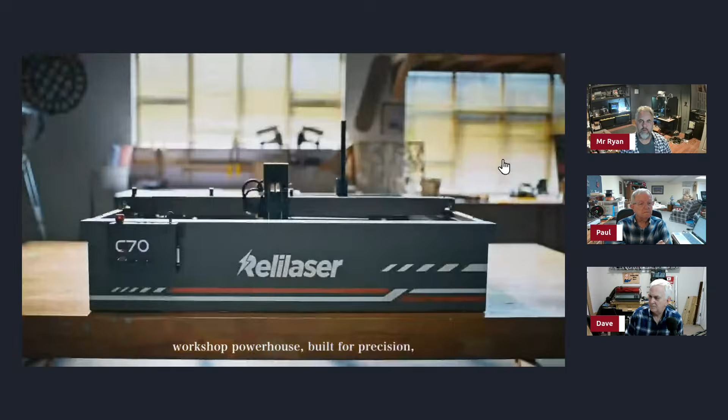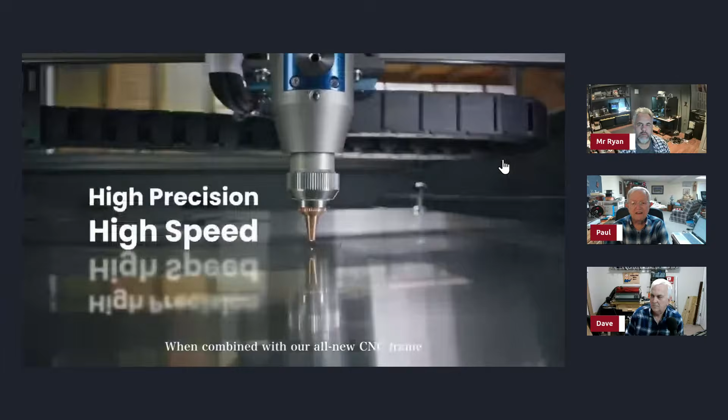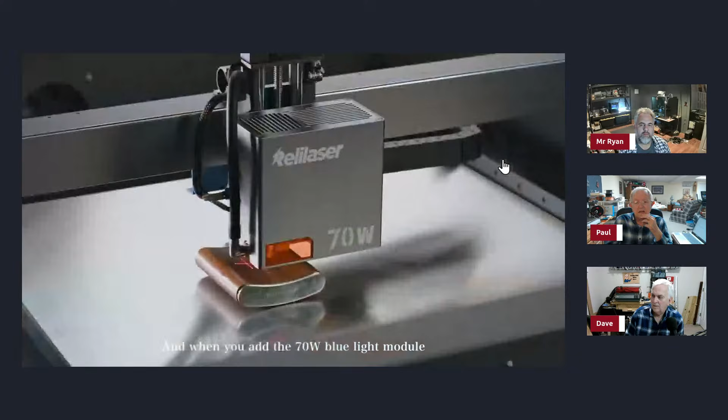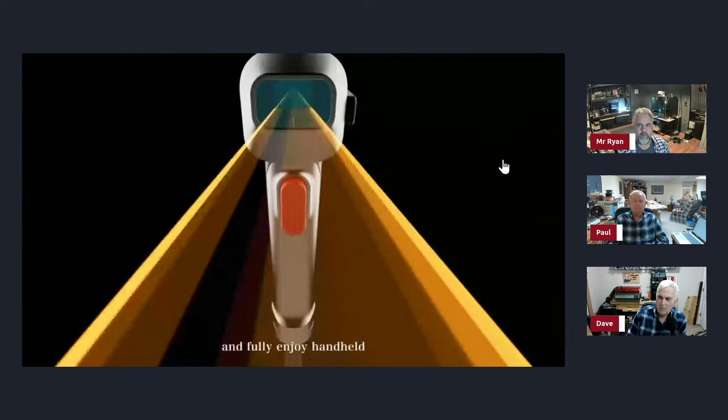I agree. Oh wow, 800 by 800. So I guess it's a dual purpose machine. Oh wow, that's cool - a little corny for me having AI where you talk to it for adjustments and stuff.

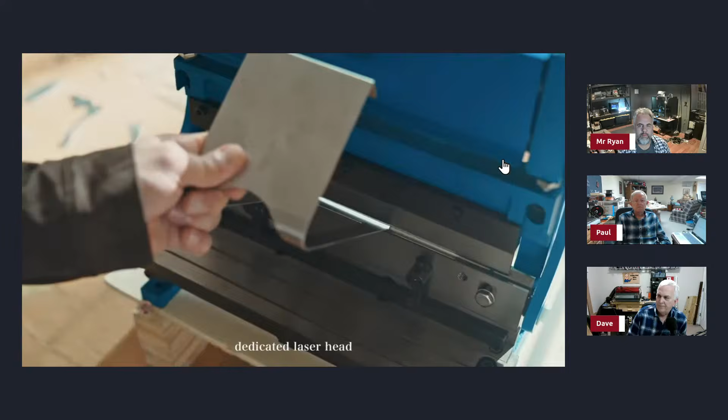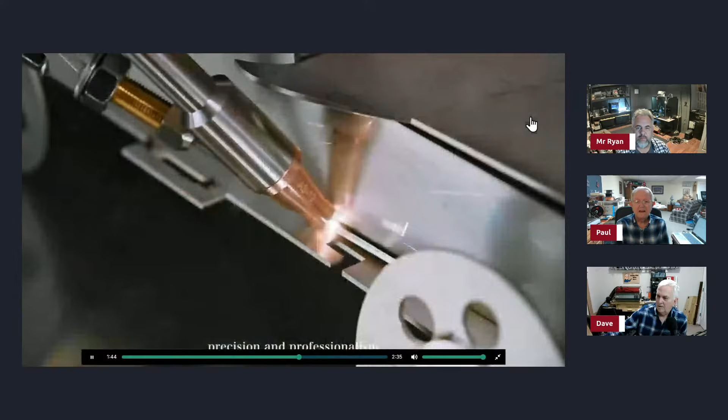You think that guy's ever run any machine before? Looks like it can make some pretty cool stuff. Yeah.

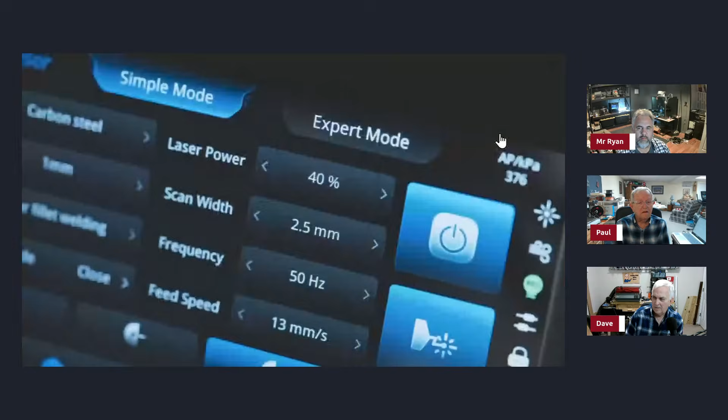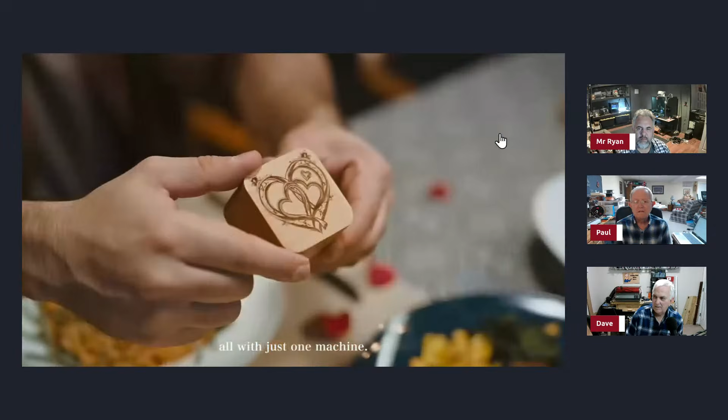But I don't know, what do y'all think about this? That guy makes it look just too easy.

All right, now it's 800 by 800 work area, so that's... I'll be right back. That's a big work area. Well, it's what, about 3 foot by 3 foot, or maybe a little less than that. Let me see if I probably... let me see if I can. I'll do some calculations.

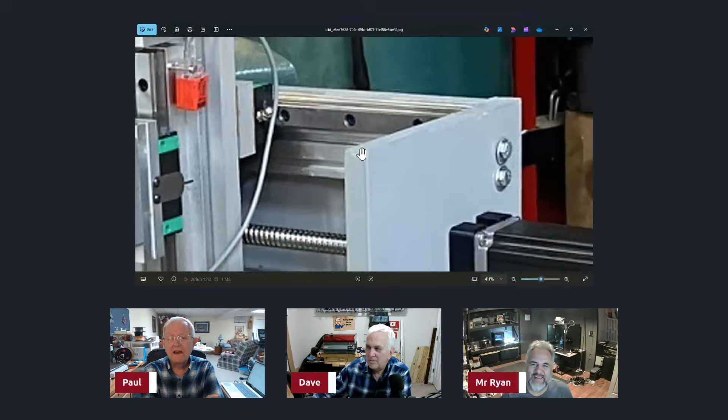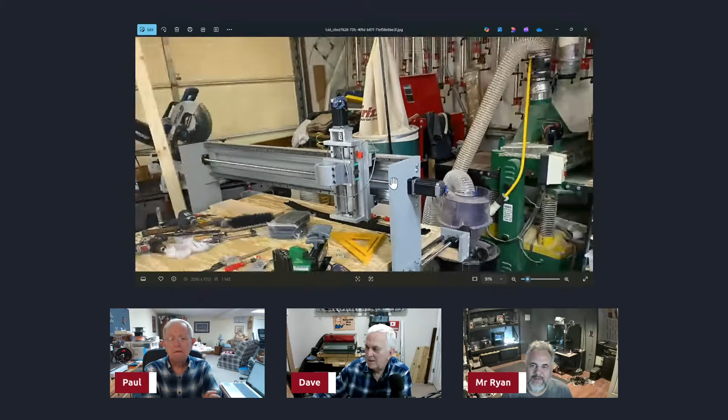Well, and you know what, I'm not sure, but I think that's plywood painted gray. Yeah, I could be wrong, it could be aluminum. I don't know, can you tell? Maybe it is aluminum, maybe he painted the aluminum gray. I don't know. But anyway, he's done it.

Looks like he's doing it pretty similar to what I've done. He's got linear rails, the BK12 or the BF12 - one's BK12, one's BF12, I don't remember which is which. But anyway, he's got his ball screw, got his nut on the outside here, and his linear rail on this side with a couple of bearings. So that's going to work out nice for him.

It looks like, I'm thinking - again I don't see him in the chat so we can't confirm any of this - I'm guessing this is a piece of plywood here, and then he's got two smaller 80-20 type extrusions. Yep, because if you look over here, it looks like he's got this, and maybe that is aluminum. He's got these screwed into the ends of the extrusion.

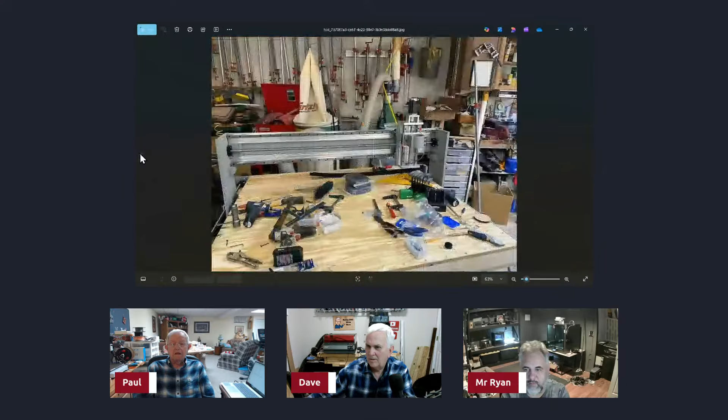Okay, all right, so let me - like I said, there's... where's the? Oh, there it is. I gotta go this way. Oh, you better take him out, he's pawing at the door. Yeah, Paul and I will keep an eye on the door.

Well, you don't know how long I have to stand out there with him. I think he's good, I think he's just not used to being in here, is what it is. What do you say, bud? You got to go potty? Is that what you're trying to tell me? Yep.

Okay, well let's go through these pictures real quick here, because here's another one. It looks like he has also purchased a pre-built carriage, the exact same Z-axis assembly that I did. The reason I say it looks like the exact same one is because if I come over here, there's that same little janky thing. I had to replace this because this little metal thing wasn't enough to trip that before it hits it, so I replaced it with a piece of aluminum angle I fabricated to make a little flag, like on this side. But other than that, it looks like that's the same thing I bought when I did mine.

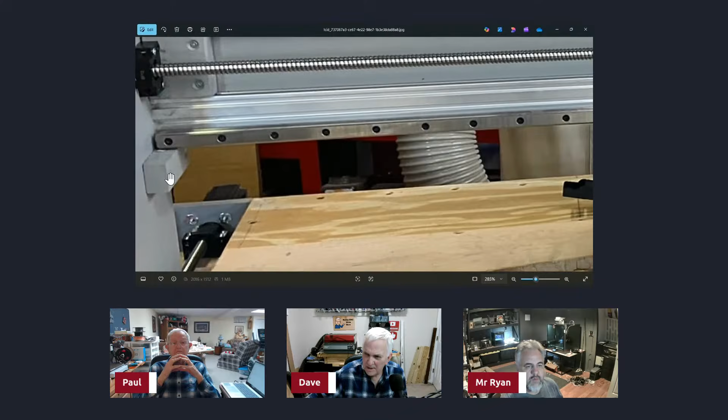But anyway, like I was telling the guys, I keep trying to decide if that's aluminum or still undecided if that's aluminum on the side or plywood painted gray. I'm gonna say plywood. You think it's plywood? Yeah, because he's got the little pieces on the inside, right there where you're looking. Yeah, well, I don't know.

Hopefully I'll get another email from him, or maybe he'll watch this later after the fact. But anyway, he had sent those to me, and I love a good... oh, there he is, there he is. It is. What is that saying?

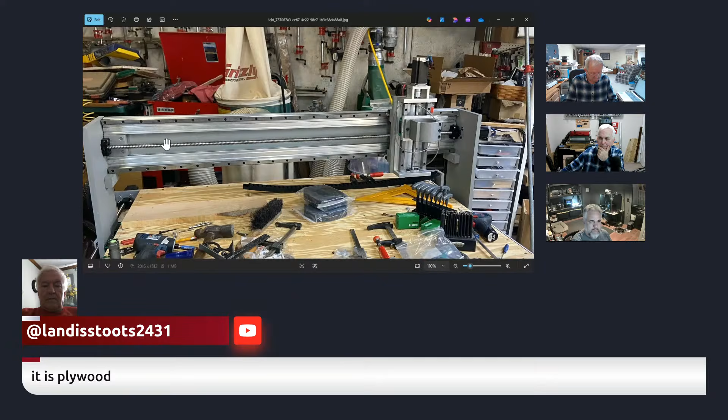It's a bracket. Okay, here it is - it is plywood. Plywood, okay, thank you, thank you for confirming that, Landis. I thought that's what it was. Now, is this back piece back here plywood as well, and then you have two pieces of extrusion going to it, or is that a big piece of aluminum flat bar? I'm going to guess that all the gray looking stuff that looks painted, I'm going to guess that's plywood.

Bear. Oh, where'd he go? Get. Hold on, that camera started going. Man.

He got way up under there. I looked under there and thought, well, he's not under there, but it was because he'd gone into another hole behind, and I'm like, oh, now he's going to get tangled up in all that wire. He just about pulled this monitor off. It started rocking. Yeah, okay. You're all right, buddy.

Landis, I like that Grizzly dust collector you got back there. All right, I'm gonna run him out real quick.

If you guys want me to leave these pictures up? Yeah, you can leave them on. Well, I guess you can't switch between them, can you? No, but that's all right. Okay, well I'll leave it up. Come on, dude, there's plenty of vertical or horizontal workspace there we can look at. Yeah.

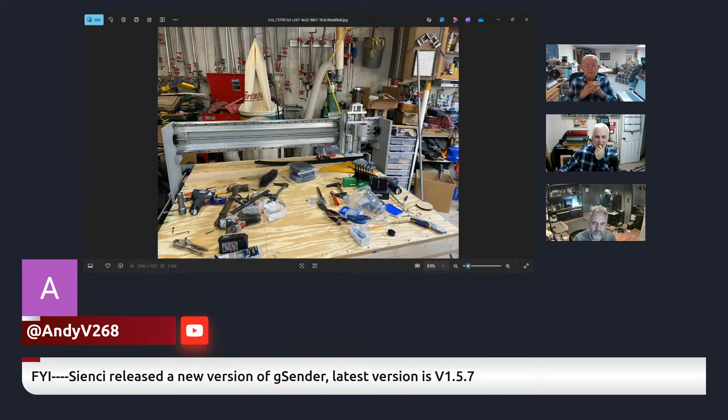I see Andy saying, oh yeah, Sienci Labs released a new version of gSender. What do tell? What's different about it?

Ooh, 59-inch long bed, oh that's nice. Okay, it is plywood as I did not have tools to make metal beds. 59 inches, okay cool.

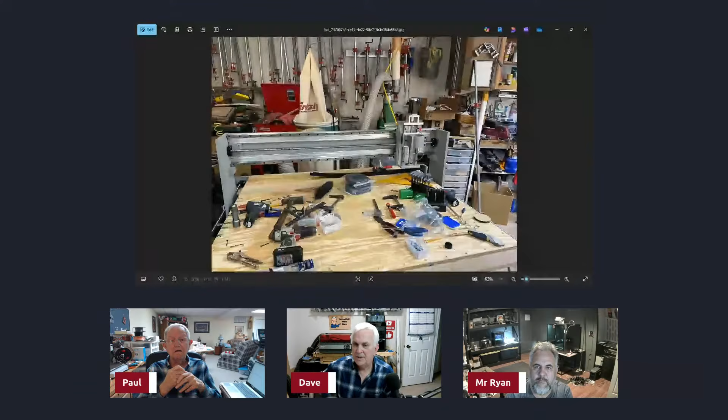Well, 59 inches is basically 1500 millimeters, so that works out perfect to be able to get well over 48 inches of cutting area on the thing. Because if I remember right, this z-axis is 6 inches wide, I believe, or maybe a little over. So if you split half of that and subtract it from the 59, it works out where you'll get probably 49 or 50 inches of cutting area there. So good deal, that makes for a lot of horizontal storage space.

Yeah, yeah, yeah. Maybe some people have more control than me and you, I, Paul. I hope, I can't imagine everybody has the same problems I have. Yeah, although there are a lot of folks just like us. Yeah, and I love when I watch a YouTube video and I see their background and it's all messy. I'm like, yeah, I don't really have a problem there. Makes me feel better. But anyway, just thought I would show those.

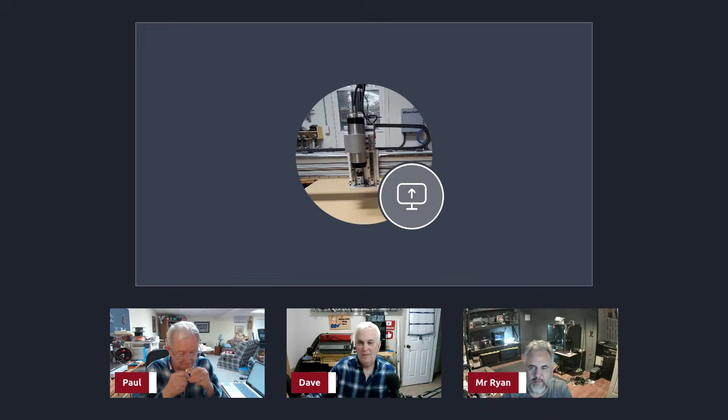Landis, that's good job on the build so far. I'm really digging it. And send us some more pictures when you get it ready to make some chips. Heck yeah.

All right, I guess he did go off somewhere. Yeah, he just walked out. I don't think he can hurt anything. He's back, there he's back. He's just wanting to wander around a little bit. Like I said, he's been a good boy here lately, I have to say. And as soon as I get done here, we'll go out and stay out however long it takes till he goes. Yeah. Where you going, Bear?

Anyhow, yeah, somebody says he wants alone time. Yeah, well normally when he wants alone time, that means he's doing something he's not supposed to, because he's pretty much.

Okay, here's, is this your first time here, or am I just not remembering that name? Parametrics 9558. So I spent so much time designing and building a CNC just like Dave, and when it finally worked, I was left with the question, now what?

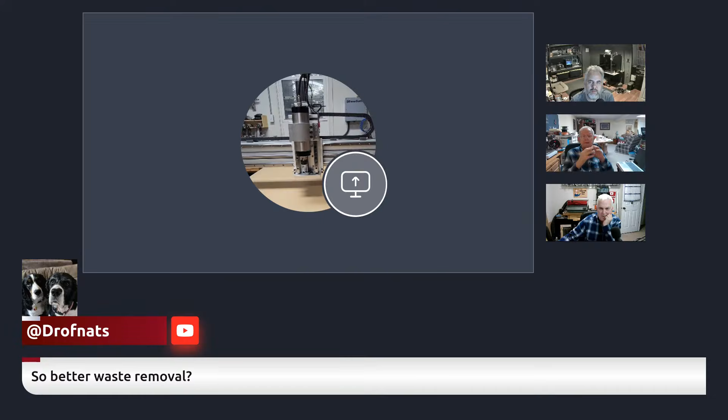My boy, I wish y'all could see him. He has crawled up under the desk and passed out - of course, not before getting into the wires. I had them all tucked around behind that hole, and when he went back there, when he come back, he's dragging them all out.

Cody just put an explanation up there on why it's better. The O-flute cutter is best for aluminum because it clears chips efficiently and prevents clogging, giving a cleaner cut and better finish, prevents galling.

Now, not to say that you can't cut aluminum with the other ones, because I've always used the CMT two flute upcut bits, and that's only because I had a ton of them from doing the Gatton CNC kits. When they would wear, I'd do so many blanks with a bit, then swap out and put a new one in, but I wouldn't throw the old one away. I'd save that for when I run aluminum or something - that way if it breaks, no big deal, it's already paid for. Over the years I had who knows how many of those CMT bits, and I would take a red Sharpie and put it on the tip of the shank so I'd know it was one that already had all the miles on it from cutting the plywood kits. But when I sold the Avid, I gave a handful of them to Melinda.